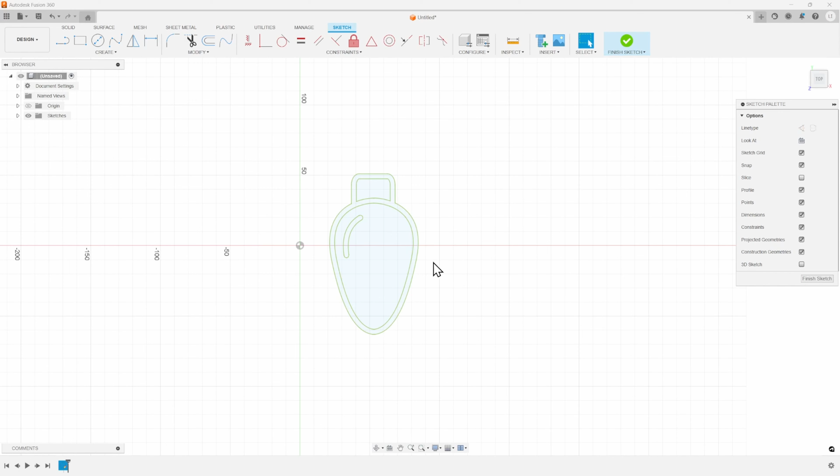All right, so here we are in Fusion 360. I did a search for a Christmas light outline, and this is the image that I found that I thought looked really, really cool. If you can start with an image that has an outline here, it does make this a little bit easier, and it saves you one step.

There's several videos out here on how to make the light boxes. This is how I make, or how I'm going to make them for this video, and you can watch along.

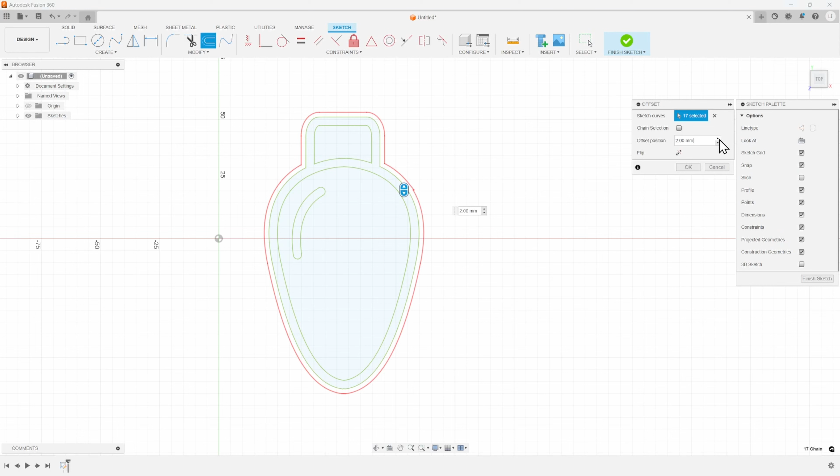I'm going to double click on the outside line there and hit O for offset. For this first one, we'll do a 2mm offset, and we'll hit OK, and you'll see that there's a little bit of a jagged line right here. Let's go ahead and fix that.

We'll hit the little squiggly line there and draw a straight line, and you'll see those little boxes come up. That means that it's in there. I'm going to hit enter right here, and then I'm going to grab this handle and put the curve in it. Just get it kind of as close as you can. We'll probably have to do this one more time whenever we do this offset one more time.

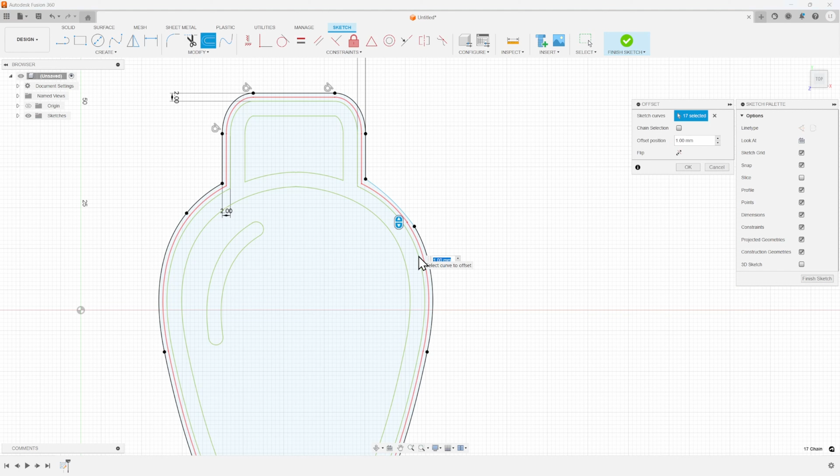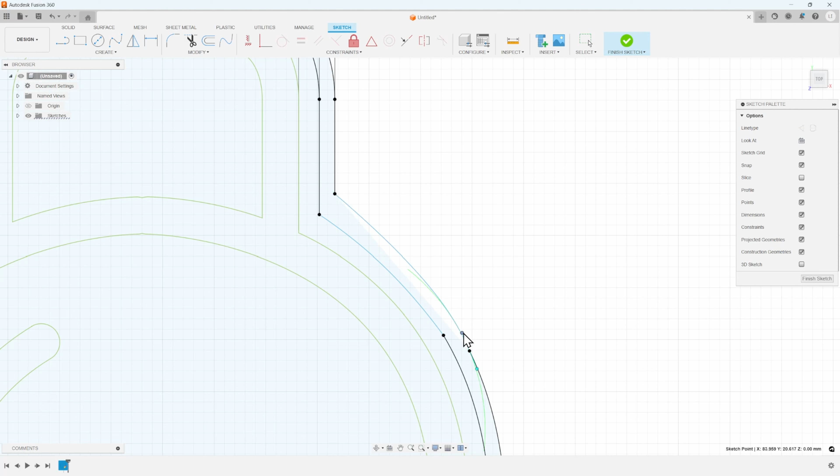So now starting again on this one, we'll click on that and we'll hit O for offset. This time we'll need to go out to 3.5. Same thing, we'll have the little jagged edge right here. Let's click on that, hit delete, click on this one, hit delete. Put this dot back in the right spot, grab this one, hit enter. And just try to get it as close as you can right there.

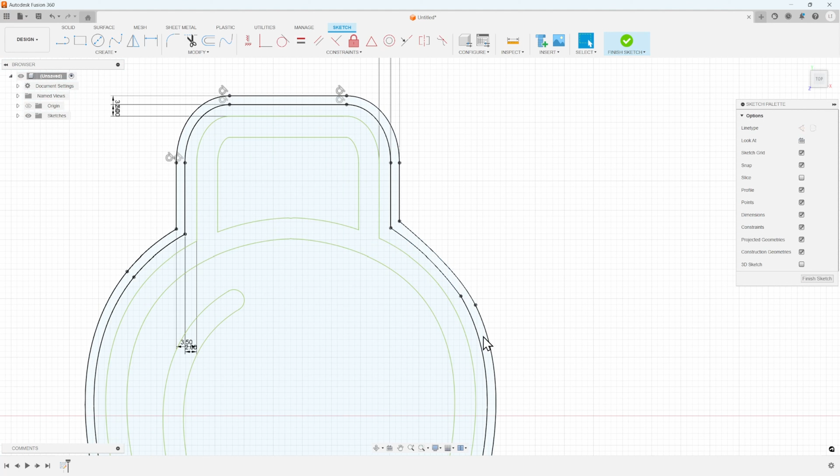What you'll want is 3 separate sections. So you see when I highlight this, that whole ring, and that whole ring goes in there. Once we have all of that, then we know we're good to go. We can hit finish sketch.

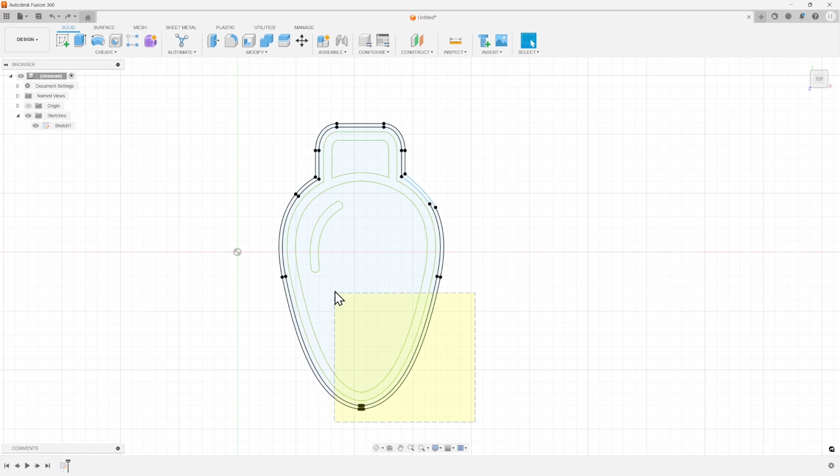Now that we have all 3 of our offsets, or our 2 offsets that we added with the line right here, now we can make the back plate. What we'll want to do with that is highlight everything, hit extrude, and we can actually make our back plate away from this top plate on this first extrusion right here. How we'll do that is we'll change where to start the extrusion.

So we'll change that to an offset of -20. I like my boxes to be, for this project, 20 millimeters. So we'll offset that back plate by 20 millimeters.

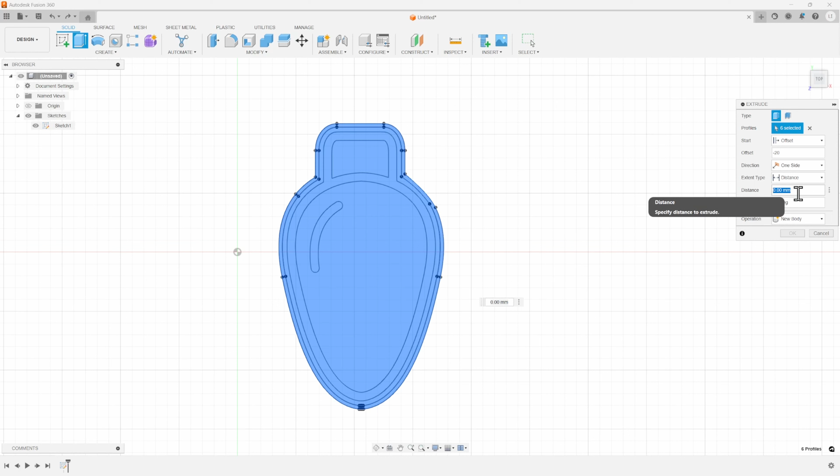And the thickness of that back plate will be 2, so that's where our extrusion of 2 millimeters will be. And we'll want to make sure that we make this a new component. We'll hit OK. We'll see that our drawing goes away, but we'll see that we have that back plate

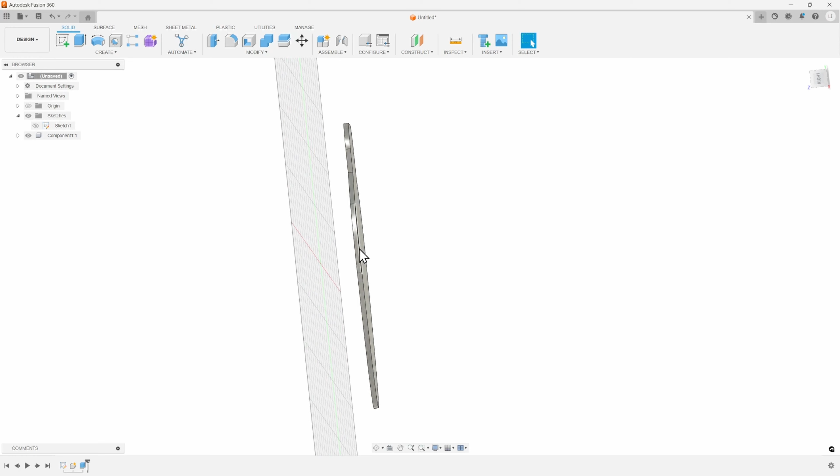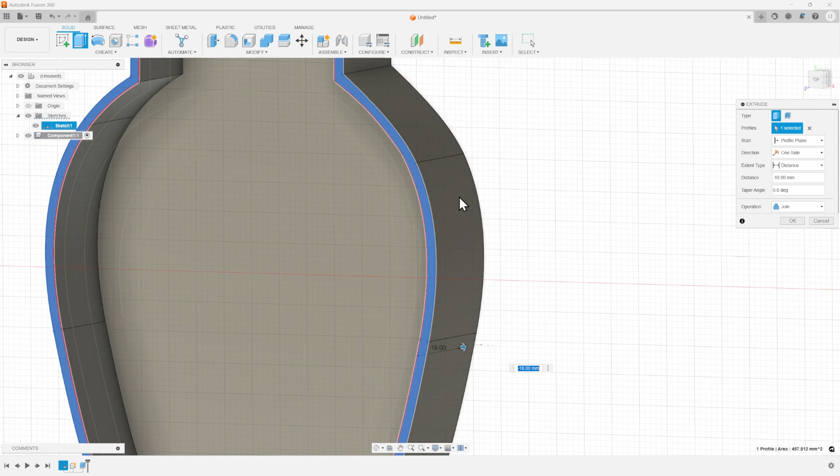And it's 20 millimeters off of the plane. So now we need to make the lip that goes from here up to that top plane. So how we'll do that is we'll rotate this back, we'll bring our sketch back, and then we'll select that outer ring and hit E on our keyboard for extrude again, rotate the model, and then click on this back plate. And you'll see that it makes that lip on the back plate. That's the easiest way to do that.

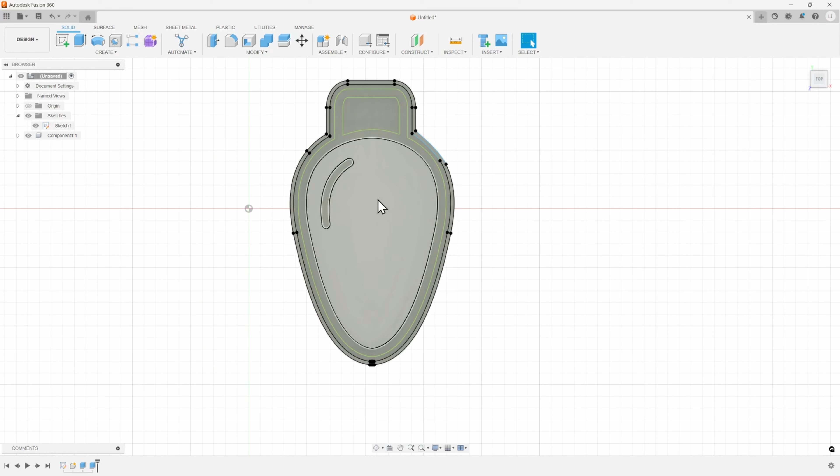And we do want to join it on this one. And then we'll hit OK. All right, and we'll see that it made that. Let's realign everything here. And now the back plate is almost done. Let's hide our sketch right here.

And what we're going to want to do here is create a hole for us to run the wires and everything through. So we'll go ahead and create a new sketch, and we'll come right around in the top here somewhere, and we'll want to go over 30 or so millimeters and about 10 millimeters wide or 12 millimeters wide, somewhere in there, make a good size hole there. So we'll do 32, and I'm just going to hit tab, and we'll do 12 millimeters there.

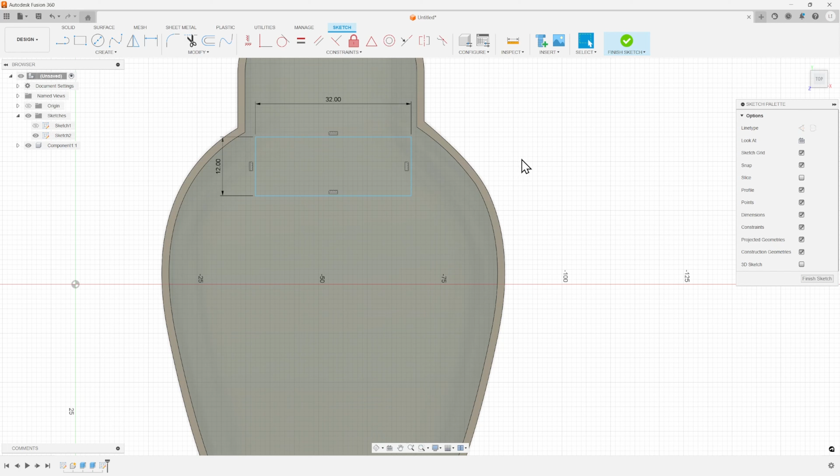Then I'm going to hit enter on my keyboard. That's going to make that sketch. I'm going to highlight that sketch and hit the extrude again. And this time we'll want to extrude -2, and that'll make a cut. We'll hit OK, and that puts a hole in the back for us to run the wires through.

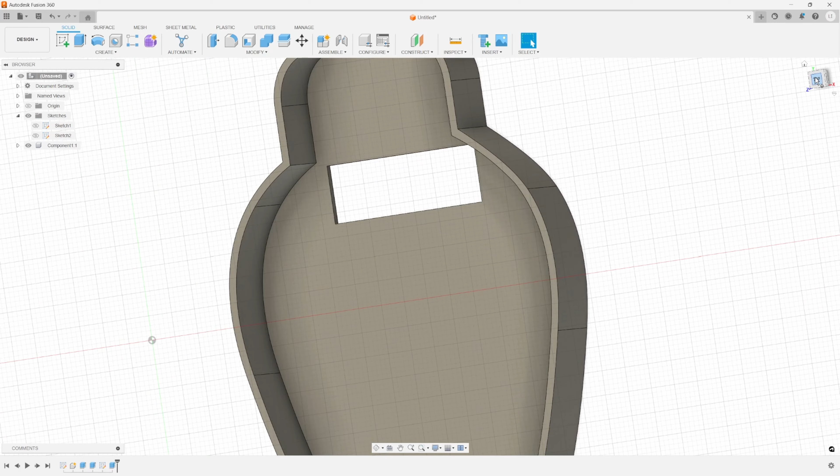Okay, and now that we're done with that, we can go over here to where it says component, and we can actually name that the back.

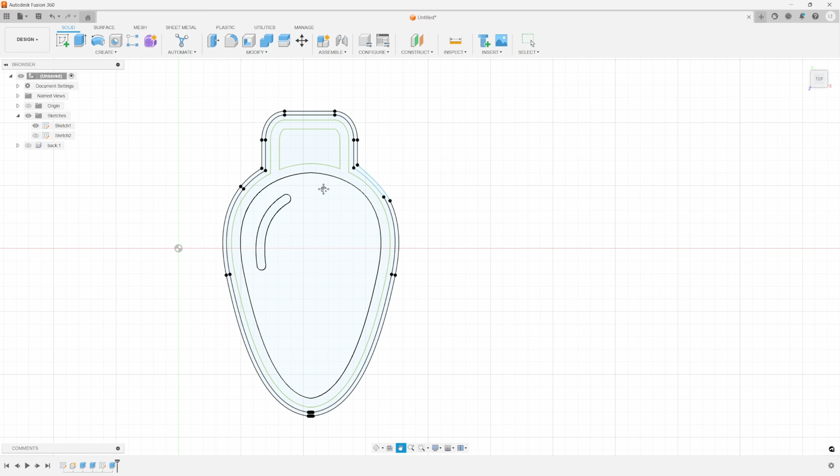So now let's bring our sketch back, but we'll hide the back plate. And now let's work on making the top plate. So I like all of the outline here and this to all be black. But we do need to make a lip in the middle right here to ride along the lip from the back plate there.

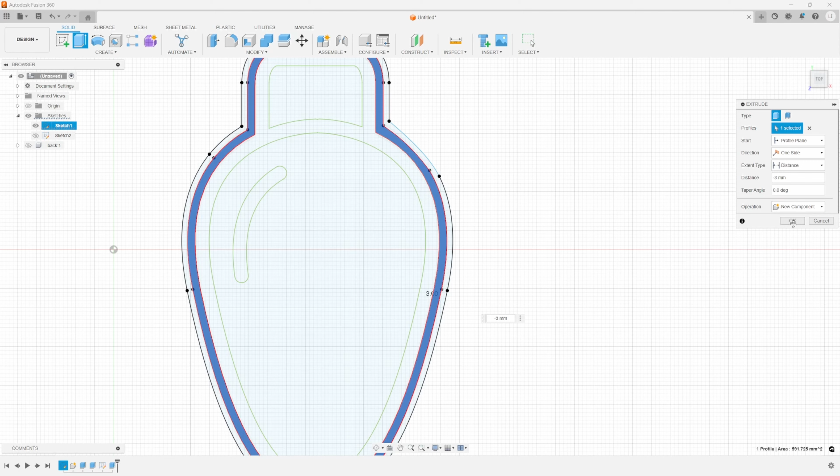So let's go ahead and highlight this one, hit extrude, and all of these extrusions will be negative and we'll be moving away from ourselves here. And this one will need to be the longest one, and this one we'll do at -3 millimeters. Okay, and again, we're going to want to make this a new component and hit OK. And we'll see now that we have that lip that will fit on the inside of our back plate there.

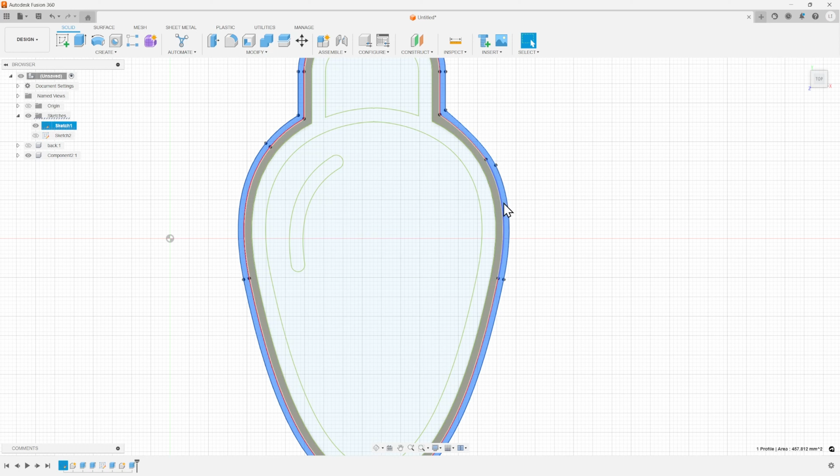Okay, so let's get this orientated again. So now let's make the rest of our outline, and we'll click on this outline here, this piece here, and this piece, because we basically want those all to be the same color and all kind of connected to each other so that we can color these pretty easily in the future.

So color this, think about how you're going to color this object as you're making these different pieces here, because each color will want to separate into a component, or into a new piece like we did for the back. So for these, we don't want a lot of light to shine through these, so these need to be a little bit thicker than everything else.

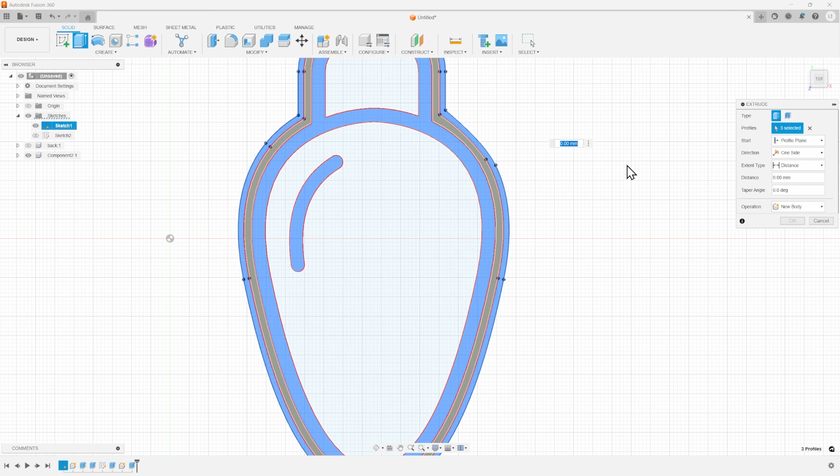So these will extrude to -1 millimeter. So I'm going to hit E on my keyboard. I'm going to go over here, -1 millimeter, and here we are going to want to join with the other outlines there and hit OK.

And now that we have that whole piece, we can name that the outline. Or if you wanted to name it the color that you want to use or whatever, then you could name it black or white or whatever color that you wanted to use there. So we'll go ahead and hit enter on there, and we'll see that we have the two pieces there.

Then the last two things that we need to do is make the color here to shine through for the light, and then the little light socket there.

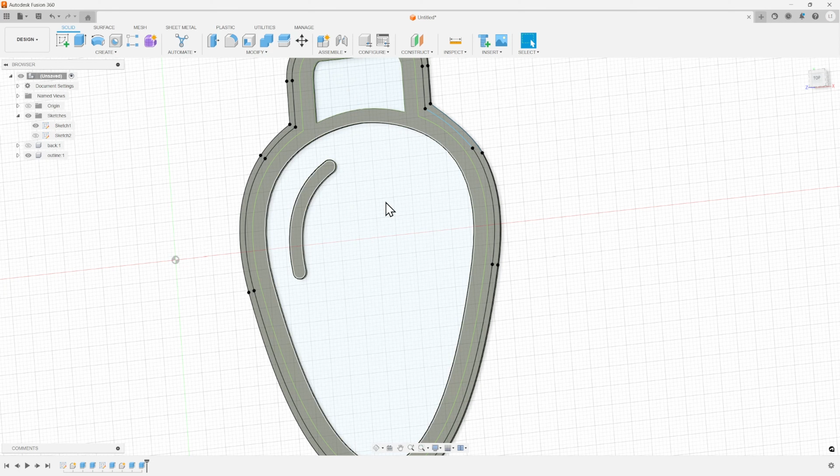So we can click in this blank area here, hit extrude. In this one, we'll want to do -0.6, so it's only 0.6 millimeters so the light can shine through. And here we're going to make a new component and hit OK.

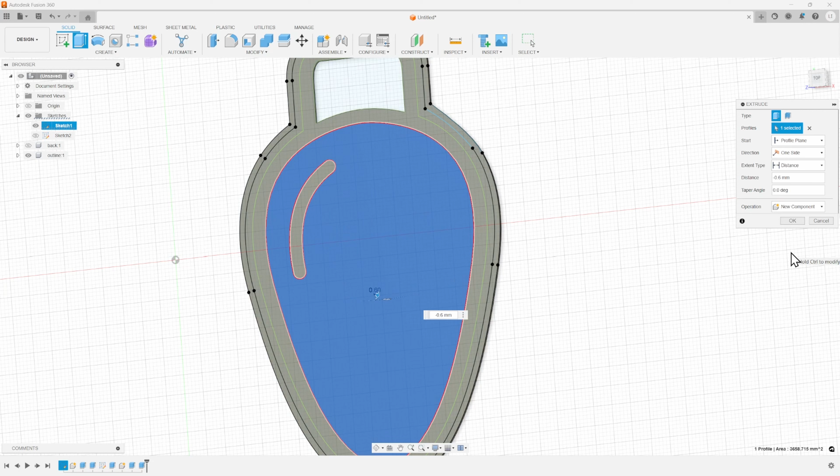Now when we spin it around, you'll see that this isn't quite as thick as everything else, and that's good. We kind of want to make it thinner so that the light shines through.

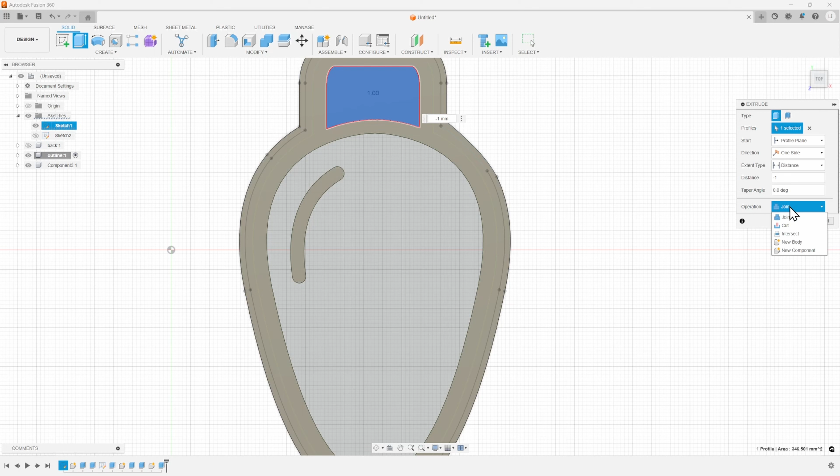Okay, so the last thing we'll do is hit the light socket up here, hit extrude. This one, we don't want very much light to go through, so we'll make that one -1 like the rest of them. But we may want to make this a different color, so we don't want to join it. We want to make it a new component, and then we'll hit OK.

So now let's name our components. This one was the color, right? The color of the light. And then this one is the socket, or whatever you want to call it. Just name those so that you have all of those in the future.

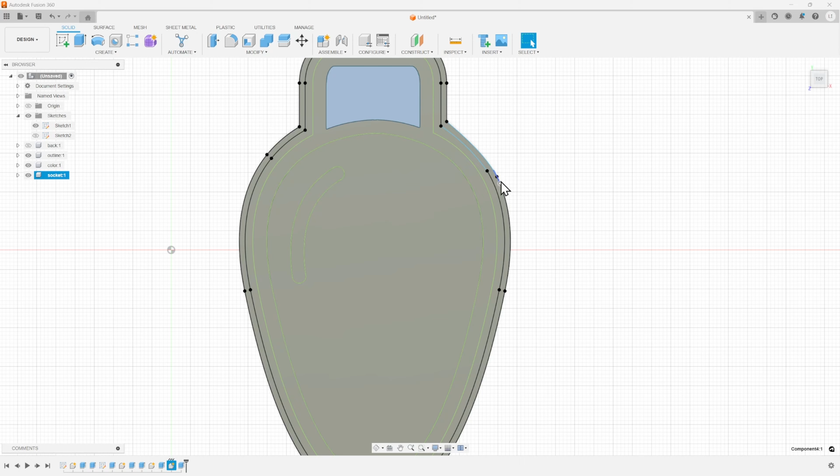So now we'll see that everything is on there. We can hide our sketch and we'll still see that everything is like that. We'll bring the back into play. We'll see that everything's in there. Our lip fits around there.

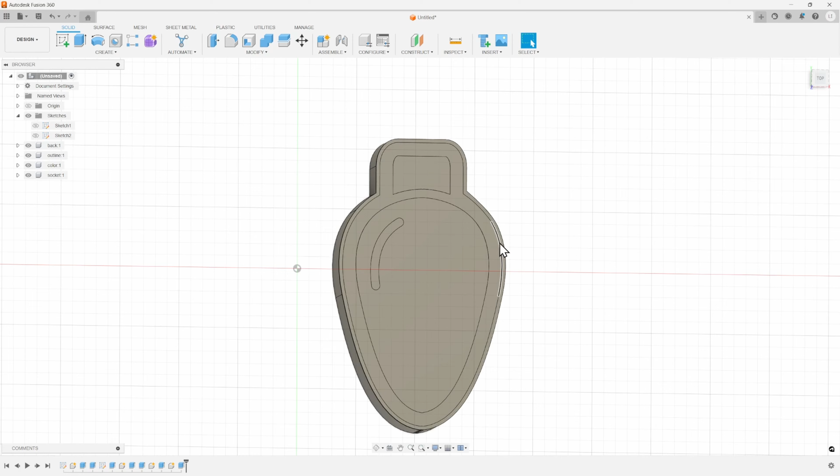So in essence, we've made our first little light, and honestly, it's that easy. You'll see where we want the outline of kind of the object that we have, and then we need the piece for the lip and all of that. But you'll see that we made that, and everything will fit together and snap together real nice. And we made a hole in the back for all of the wires and everything.

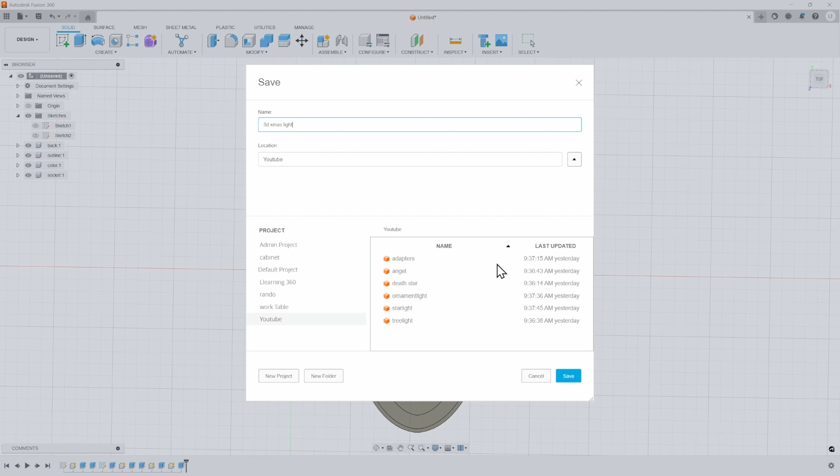And we'll save it into our YouTube folder, and we'll call this the 3D Xmas light. And we'll save that. Now, in order to export it to Bambu to get it printing, instead of hitting the 3D print like you've seen me hit before, let's hit the export button, and we'll keep it the same name. But what we want to do here is change this to a step file.

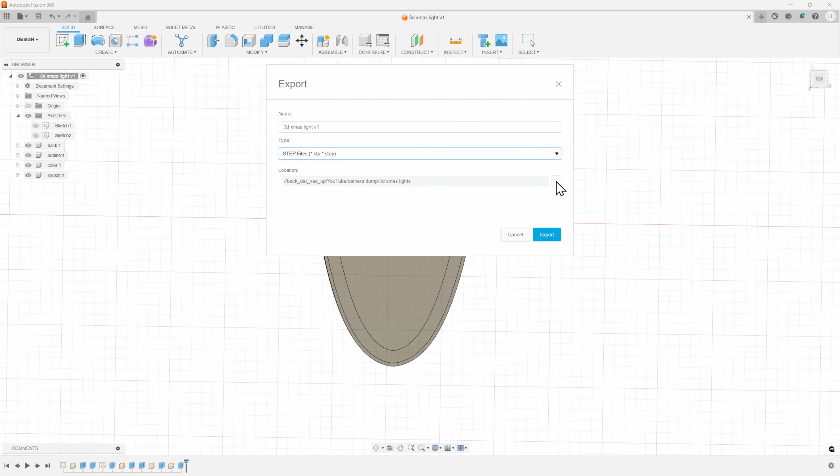So let's save it as a step file, or export it as a step file, and choose the location for that file to be saved. I'll do that, and I'll meet you when I get that done. All right, you'll see that I saved it to my desktop right here, and we have this step file that's associated with Bambu already. So we'll go ahead and double click this to open it up in Bambu Studio.

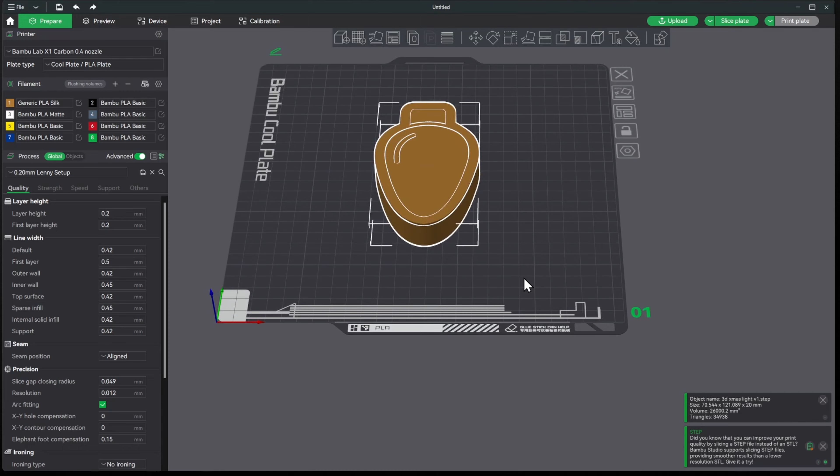All right, now that we have it open in Bambu Studio, we'll need to do a couple of things here. The first one is, let's go ahead and hit Control-C to copy this object, and then hit Control-V for paste. And now we have two of these objects.

So go over here to the object, and basically we want one of these to be the top and one of these to be the bottom or the back plate. So we need to delete the other three from one to make it the back, and then delete the back from the other one to make it just the top, or the other three here.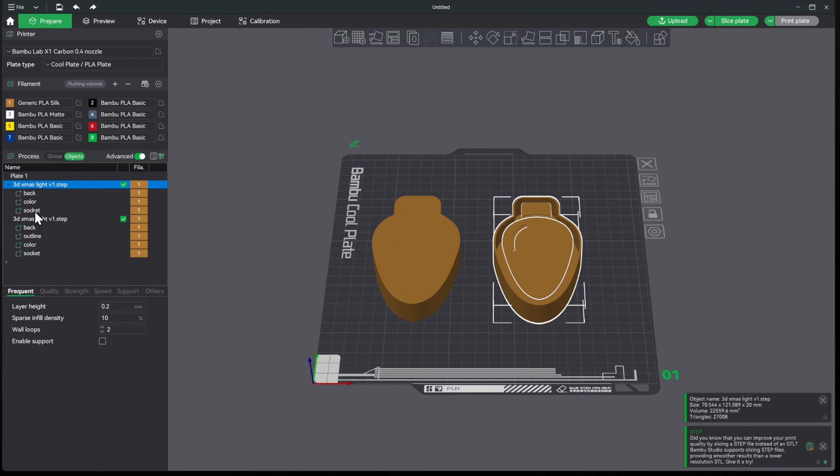So let's go ahead and start with this one, and we'll go ahead and delete these three things, so we're just left with the back plate there. Then we'll select this object and just delete the back plate. And for this one, we'll want to flip it over on its face.

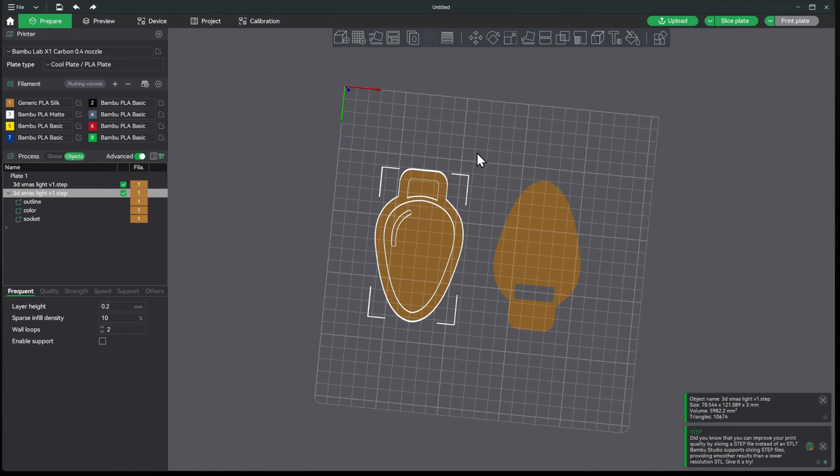All right, so we'll just hit flip on face, and we'll click on that front face there, and you'll see that now it's facing downwards like so.

Okay, so now I like the back piece to be black, so we'll change that to black, and now we can just go in here and color these. So I like the outline to be black. We'll change this first color to blue, and then the socket will be that gray color.

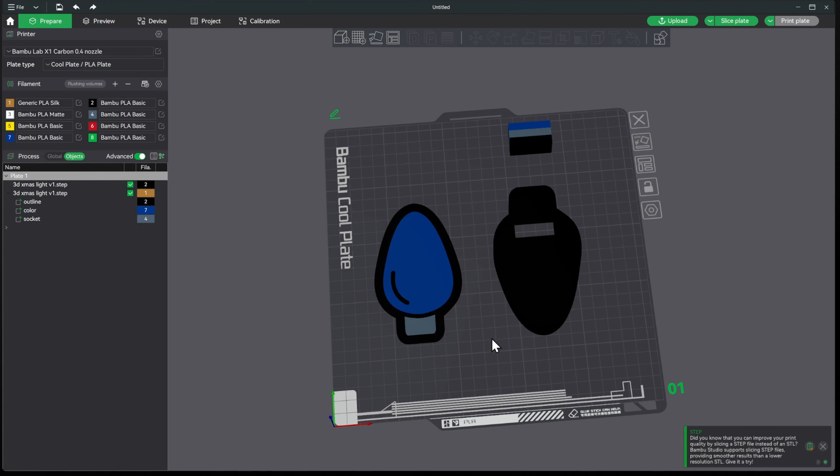So now you'll see that we have the light here and everything ready to go so that we can print it. And then I was able to get 2 of these.

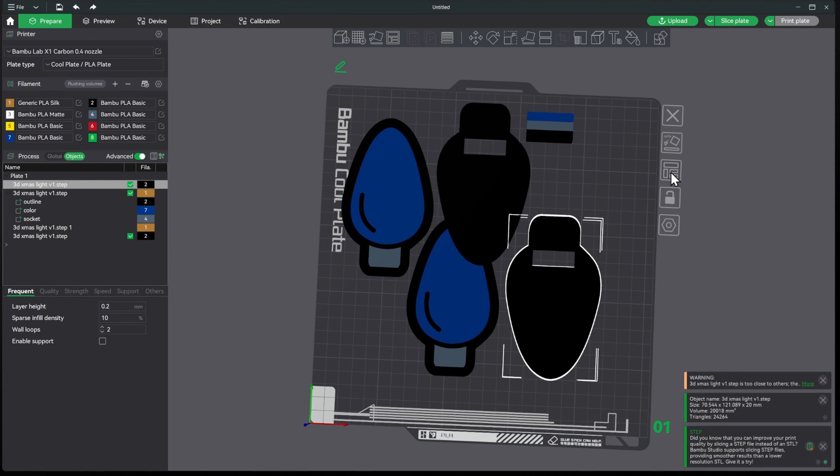It prints pretty easily. So I will save this whole setup into MakerWorld just like this for Bambu Studio and everything, as well as that STEP file, as well as all of the other ones that we do.

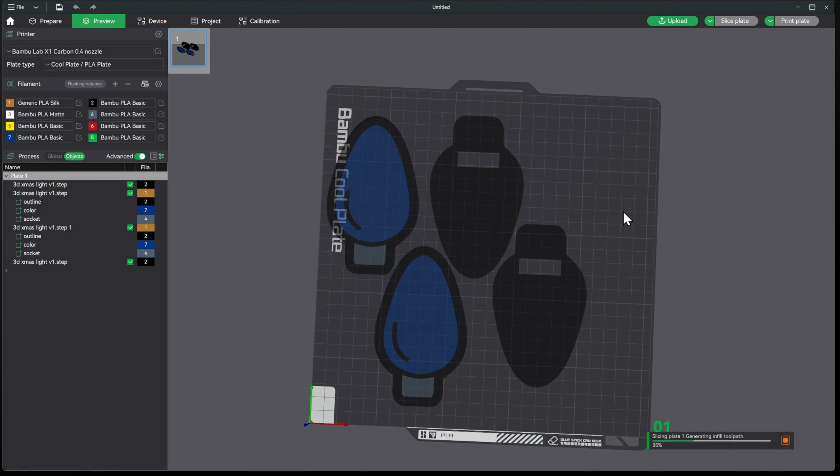So we'll go ahead and slice the plate so you can see how long this takes to print, and it's about an hour and 45 minutes. So we'll go ahead and get a couple of colors of these printed, and I'll meet you back in Fusion 360 to look at a couple of other lights that I made.

All right, so while that one is printing, let's look at a couple of these other ones that I made, and it really didn't take me that long to make all of these. The trick that I used is I just searched for Christmas light outline, and all of these other ones that you'll see, I did a search for that and an outline and found some SVG or some images that I could easily convert to an SVG to bring in here to do this.

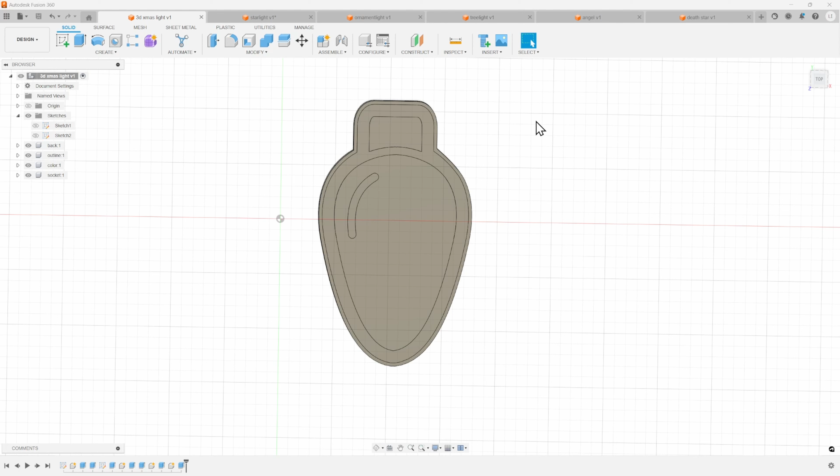And the other thing that you'll see here too is on some of these, I've put 2 holes in the back, even with the thing for the wires.

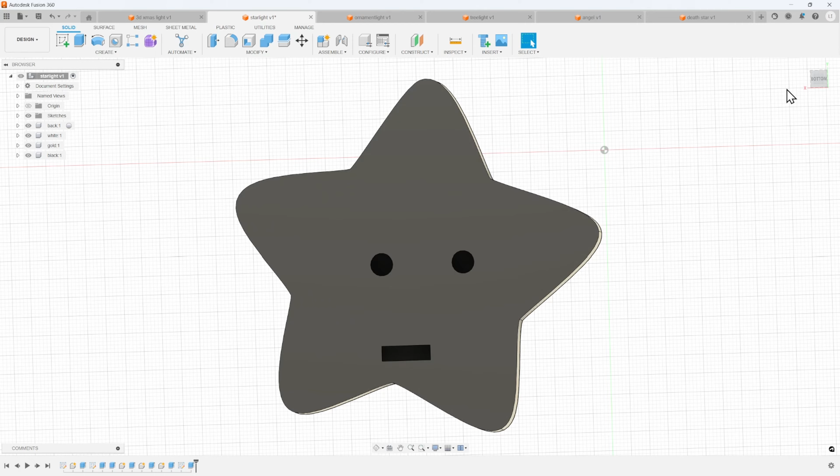What this is for is to run a zip tie around it, because if this is the star that you want, like on the top of your tree, you may need to zip tie it up there for it to stay put. So on some of these, I put 2 little holes in the back, 5 or 6 millimeters, in order to run a zip tie through so that you could tie it down, or a little wire or something like that. So I made a cool little star one here.

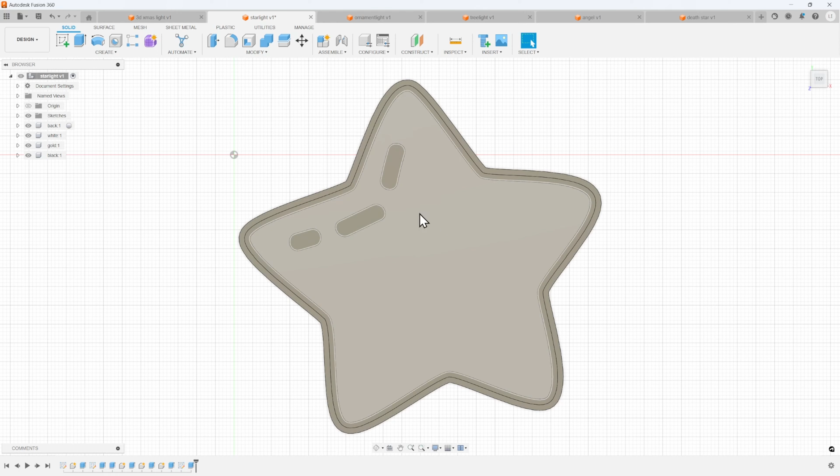So if you wanted to put that on the top, or as one of the things there, a cool little ornament. And again, as you can see, I made all these little different things, the ornament outline.

So that's all one color. Then the dots are all one color. Then the top is a color, the dot background, the stripe background, bottom color, and the ornament top are all different colors there. Right. So, that's why I said, as you're extruding these out, keep in mind which ones you want light to pass through, which ones you don't want light to pass through.

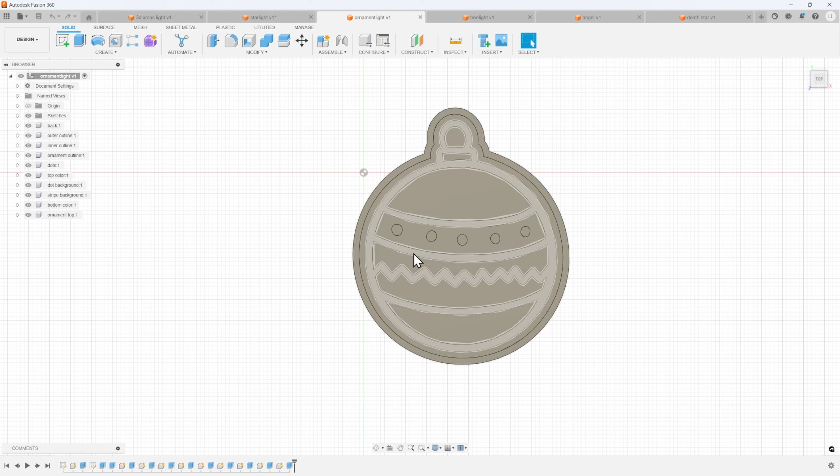But then think about how you're going to color it too, and how you might want to group some of those things or not group some of those things to make it easier to color once you're in Studio.

And then even here, for each light, you can have a different color in there. And that took a little bit of time to do, but it wasn't that much time to do. And again, all I searched for was a tree outline, Christmas tree outline, and I got this shape and was able to do all of that.

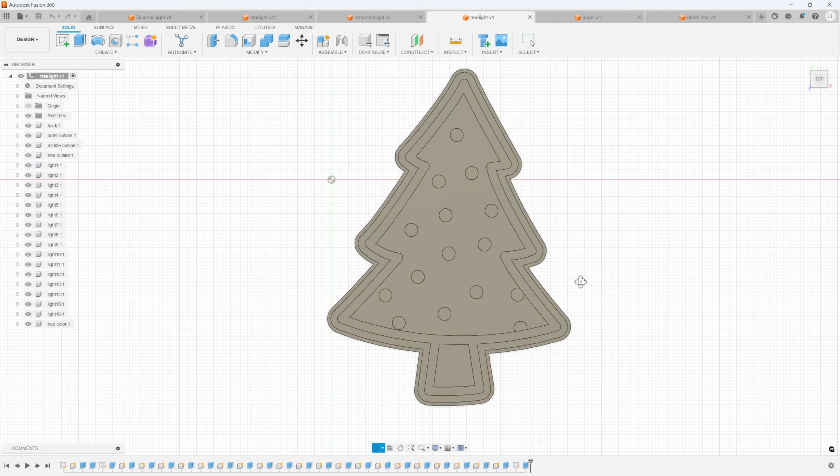And same thing, right? You might need these to attach it to something, and a place to run the wires in the back.

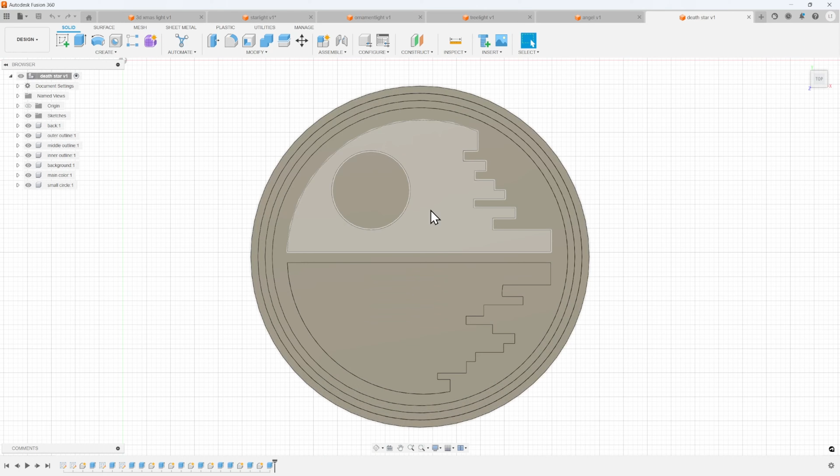Then, same thing with the angel for the top, same thing with the places for the zip tie in the back. And then if you really want a cool star, right, and you even have the Death Star here, and again, the 2 holes in the back.

So I'll put all of these up on MakerWorld for you to do, and I'll load all of these in Bambu Studio and export it that way, so you can just click on import into Studio.

So I thought all of these would be cool, and it would make really cool decorations to make our 3D printed Christmas lights for our Christmas tree. So I'll get all of this stuff printed out and loaded onto MakerWorld, and I'll see you when some of this stuff starts to get done.

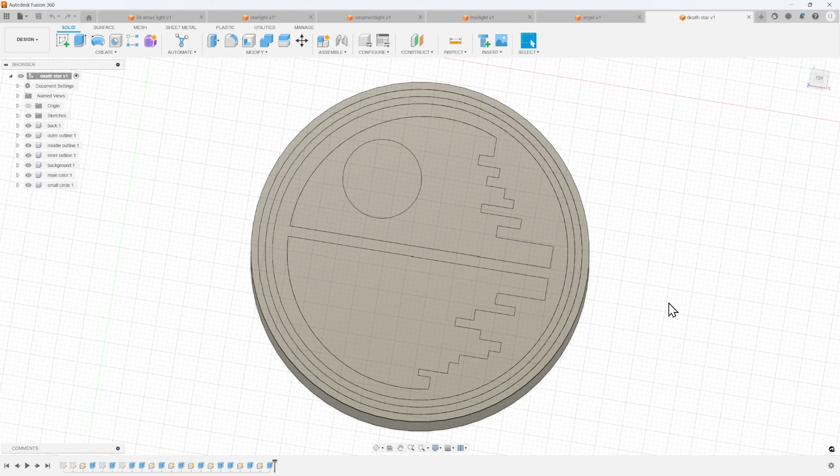Since the angel will be at the top, we'll do that one first, then run wire from that to the very next one, which plugs into the next strip, which goes around the next light, then to the next wire, and so on and so forth.

So a couple of tricks here. You'll see on the light that there's an arrow. Our power source is going to be at the bottom, so the arrow needs to point to that last object every time, otherwise the lights won't work. Make sure you pay attention to that.

You'll see here that I got this ready to go, and I'm going to mount this around. I'll peel the little tape off. Be sure that you get this all the way on the bottom so the lid can close. I'll get this wrapped around, and then clipped in.

I have the other end of the wire on here so we can test it, and every couple of ones, go ahead and test it and make sure you don't have anything going on.

This is what highlighted me to the fact that you need to run these arrows up, because I actually got to the next one and must have switched the LED strip around, which caused an issue. So I stopped everything to make a note of that for everybody. Do make sure you follow the arrow all the way down, so the very last ornament or whatever it happens to be on the bottom, the power comes in and goes all the way up to the top. Make sure you do that.